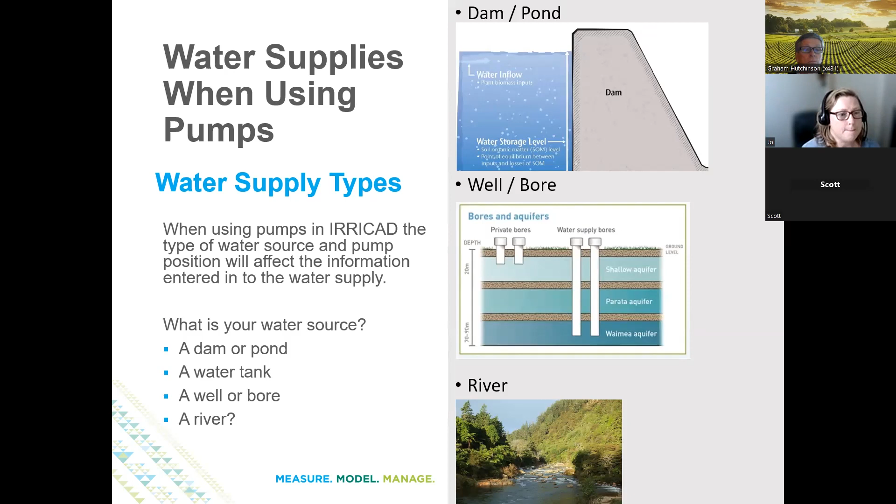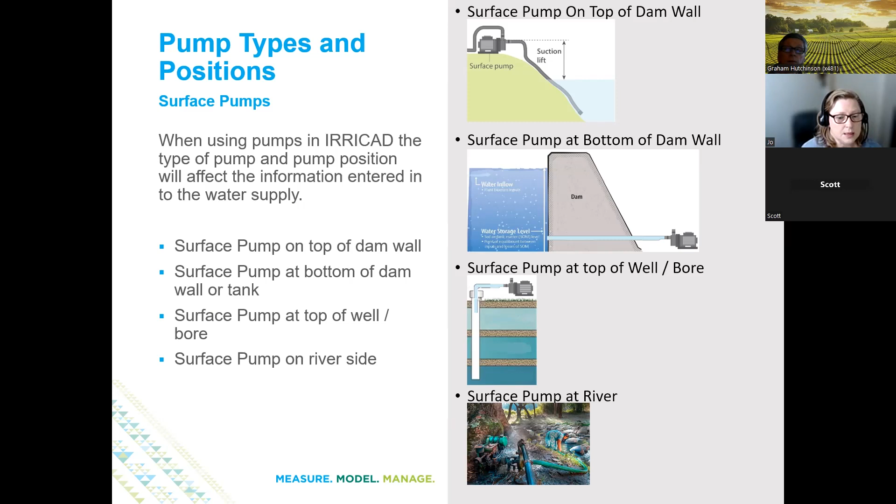The other thing that we need to consider is the position and types of the pump. So if it is a surface pump, where is the pump position? Is it on top of the dam wall? Is it at the bottom, pumping out of the bottom of the dam or water tank? Is it pumping out of a well or a bore? Is it pumping out of the river? And if it's a submersible pump, what type of water source is it? Is it a dam, pond, or tank? Is it a well? Or is it pumping out of the river?

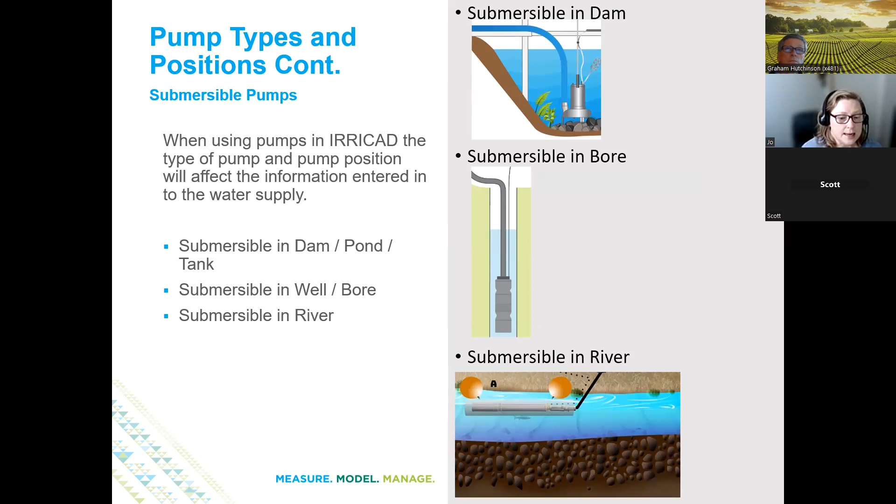Now, these things all come together to help us know what type of information we put into the water supply or the water source that is in our Irricad design. So they are measured differently depending on the pump type and position. So if it's a surface pump, the important thing is what is the level of water below or above the pump in meters or feet. And if it's a submersible pump, where is the water level relative to ground level? So depending on the pump and depending on the source, these will be different.

And I've put a note there for myself. I mean, you probably know this off the top of your head, but one foot of head is 0.433 pounds per square inch. So I'll have to keep that in mind if I need to do any calculations.

Right, so the time that we would be putting negative design heads into the water supply is if the surface pump is pumping out of a well, so the water level is below the pump, or if you have a submersible pump where the water level is below ground level, such as in a well or a dam where the water level is definitely below the normal ground level.

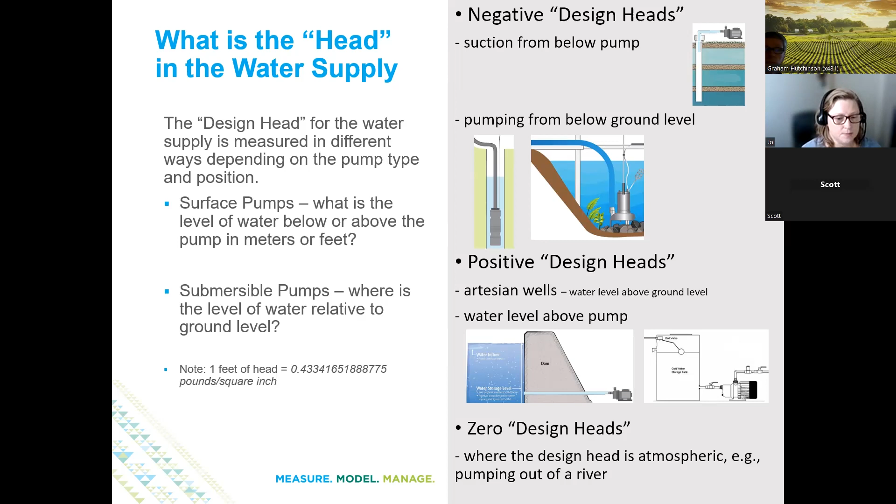And there's also other factors to consider when you are using pumps in an Irricad design. So for surface pumps, you might want to add in the allowance for suction hose losses, headworks losses, such as what is in around the pump station, such as pipe work, elbows and tees, isolating valves, filters, etc.

And if you're pumping out of a well, there will be drawdown in the well. So that's irrespective of whether it's a surface pump or a submersible pump, there will be drawdown if it's a well. If you're using a submersible pump, then we're going to have losses in the rising column, as well as other headworks losses. So these items can all be included in the design for Irricad to hydraulically calculate the friction losses based on flow.

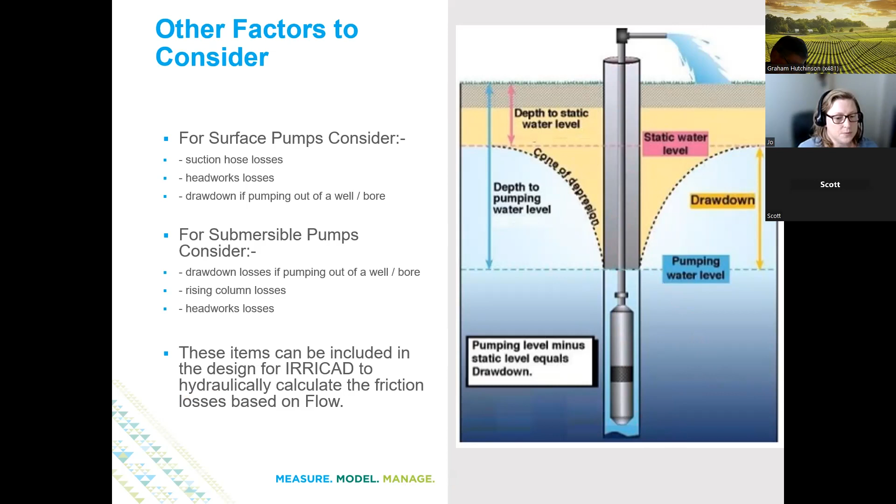So we can add those items one by one along the main line after the water supply. So we have our water supply and we've determined what the design head will be based on the water source type and the pump and position of the pump.

Next, I like to place the pump on the main line, because if this is a negative pressure, we're going to have negative pressure in the pipe until the pump adds pressure into the system. So if I put this next, then I know there's only going to be one pipe with negative pressure. And if I'm getting messages about there being more than one pipe with a negative pressure, then I know that I need to go and have a look to see where that is.

And here you can see that I've placed drawdown losses, rising column losses because my pump is a submersible in this case, headworks losses, and you can do headworks losses in a couple of different ways. You can have it as a set value, and you might want to do that for things like an automatic backwash filter or even a manual filter,

where you know that there's going to be a pressure loss or a maximum differential across the filter before it will be cleaned, and you want to allow for that maximum so that you know that even when it's just before being cleaned, there will be enough pressure in the system to provide the valves with the pressure that they need. And you can also have these values based on flow. So when there's a higher flow, there's a higher head loss. When there's a lower flow, there's a lower head loss.

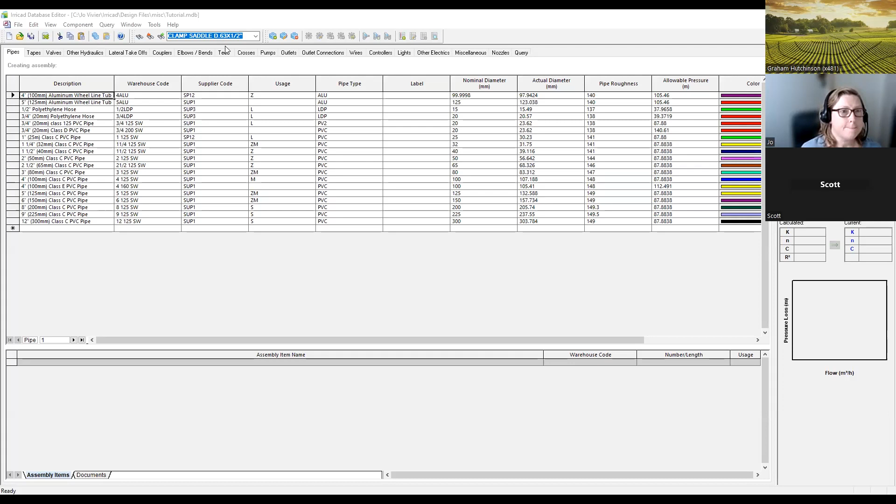Thanks. Okay, so I've actually put the pump in, but I'll show you how I did it. I just need to move that out of the way. Right, so with pumps, you want to have a pump curve that you can get information from into the database editor.

So here we have, oh, this is going to be awkward, isn't it? Oh no, it's a screen, not an application. That's cool. Can you see the manual on the screen? No, we can't, Jo. You're just seeing the database editor. Yeah. You'll need to share the screen, not the application, I think. Well, it does say screen sharing. So let me just see what I can do. Except it doesn't want to pop up. Ah, because I'm looking on the wrong screen. Sorry, my controls have gone very small and I can't seem to get them bigger. Okay, stop share. Share screen. Okay, can you see the notes now?

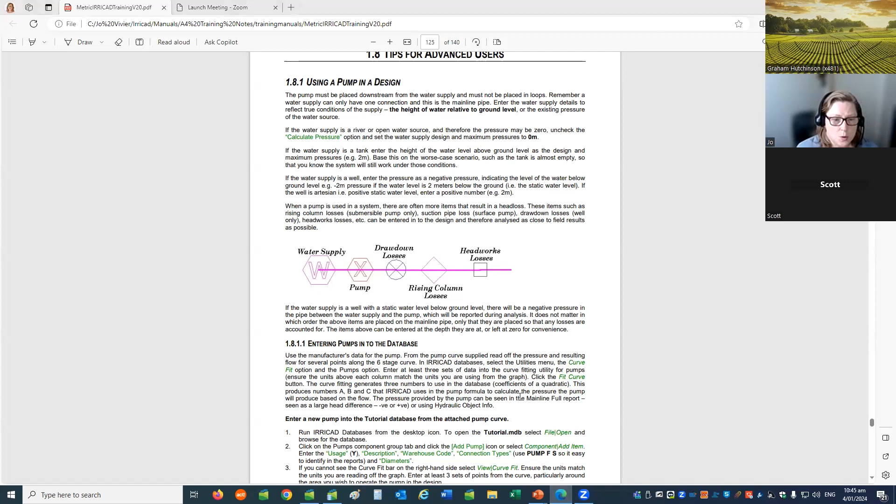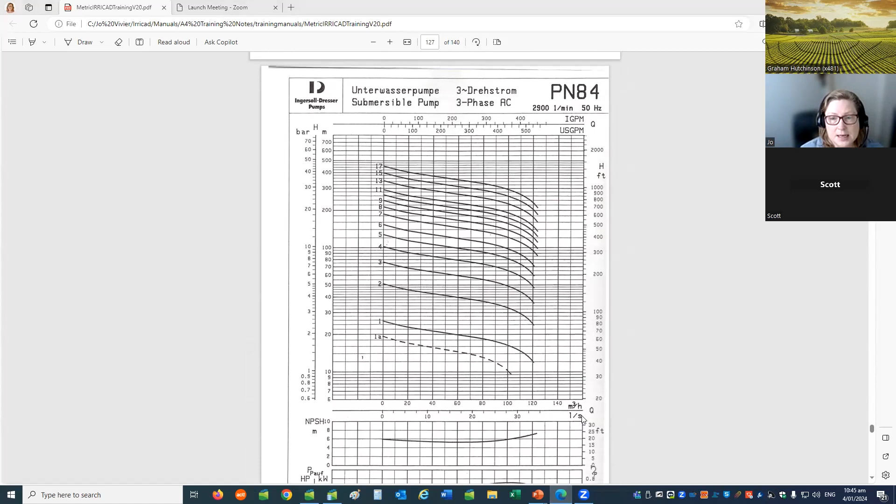Yes. Okay, so when we're using a pump, we're going to have a look at a pump curve. And of course, if you have a table with the pump curve, that's a lot easier than reading the information off the screen. So here we can see that this particular pump curve has all sorts of different units, so you can choose the ones that you like to use. So we've got bar, meters, cubic meters per hour, liters per second for metric, and we've got feet, US gallons per minute, and if you really want to, imperial gallons per minute.

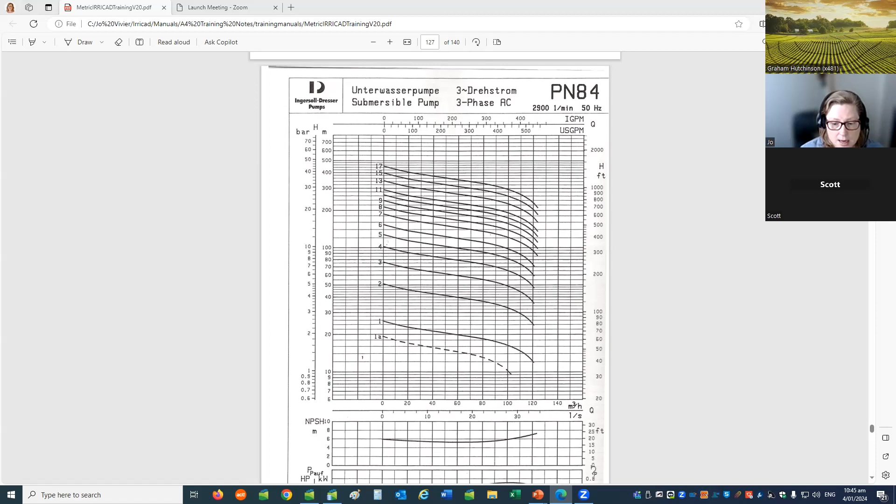And when we go back to the database editor, hopefully that shows straight away. Yep. We can see that we can choose all sorts of different units for the flow and for the pressure. So you can choose whichever ones you want, as long as you make sure that you keep reading the correct units off the chart. So I'm just going to put in the metric ones because that's the ones that I'm used to reading off this chart.

And we're just going to put in this 6-stage curve here. So when I enter the information, you need at least 3 sets of data to be able to get the curve fitting to produce some numbers for you. But put in as much as you can within the working area of, in this case, a pump. Okay, so these are just figures that I have read off the graph.

We click Fit Curve, and well, they're slightly different to what I had there before. If you want to update the information, that's there. And when you put in a new item into the database editor, it's going to copy either the first item in the list or a specific item that you've selected. If it's quite similar, then there's only a few things you need to change. But one of the things you will be changing is the hydraulic performance of the item.

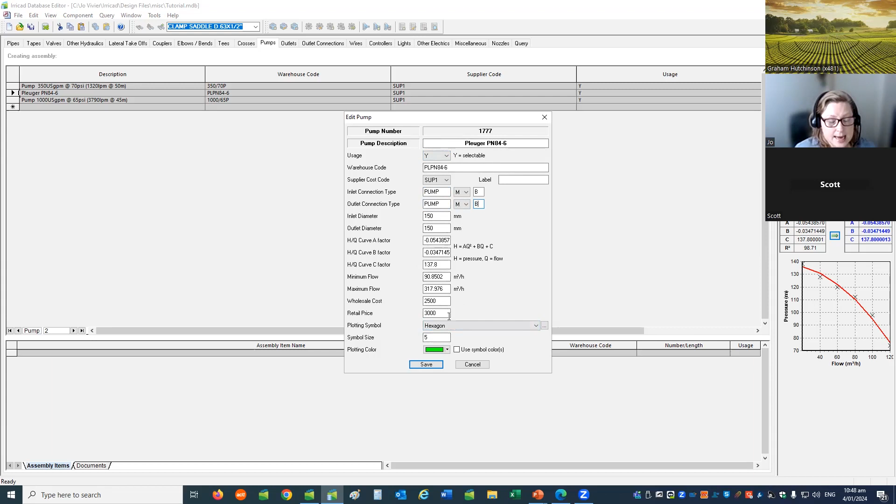And what I'm going to do for the purposes of this tutorial is just change the connection codes to pump so that we can easily see this in the reports that we're going to be looking at in a minute. Okay, so we've given it a plotting symbol. It has a price. It has minimum and maximum flows, and of course the hydraulic data that we've told it needs to have. So then Irricad knows how this pump is going to perform based on the flow going through it. Okay, so here is the item.

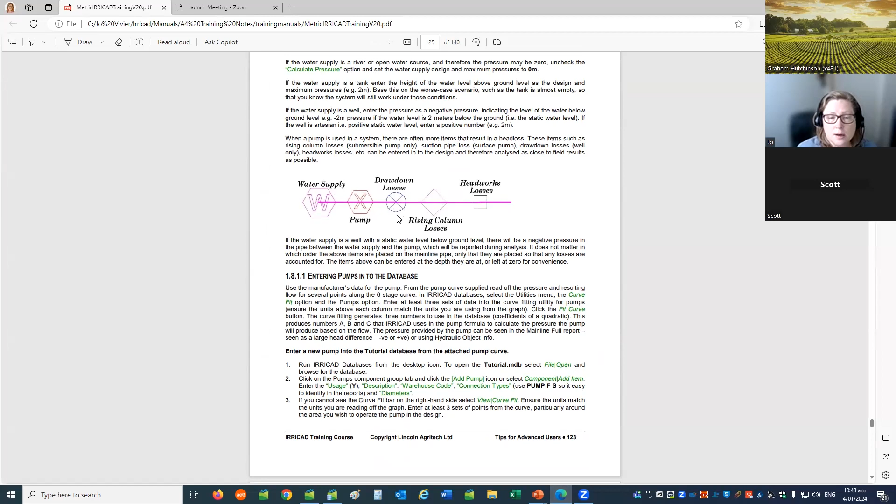Now, the other items that we need to consider that we can see in our little graph here are things like drawdown losses for a well or a bore. Now, drawdown losses are typically based on well tests. So this will be the pumping level minus the static water level. And the database group that we put it in is the other hydraulics. And this tends to have the equation of head loss equals a constant times the flow to the power of an index plus C, which is an intercept, which may or may not be used.

And if we go back to the notes, we can see here that internally, regardless of what units you might put into the curve fitting table, internally the head loss is in meters and the flow is in cubic meters per hour. So if you were going to be working things out just using that equation, which is what I'm going to be doing because I only have one well test or one drawdown test, you need to make sure that it is in those units.

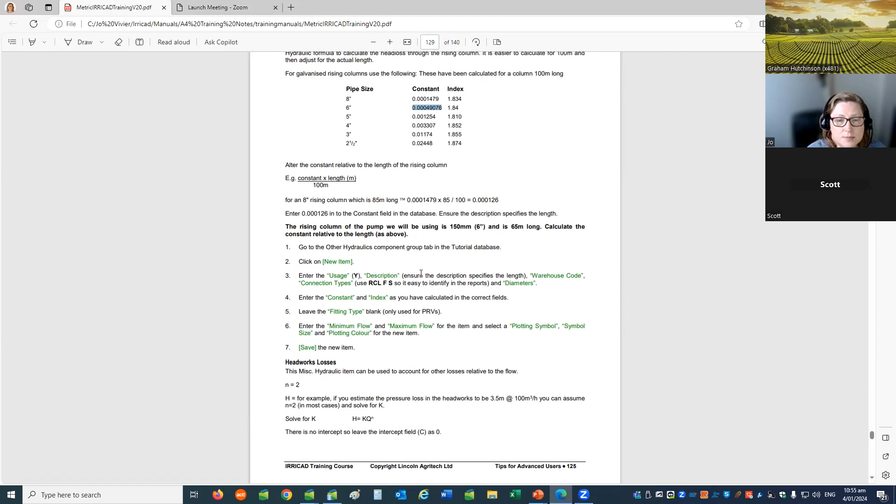But we have one that's only 65 meters long. So we need to solve for what the constant will be, which is a fairly easy calculation in this case, that we're just multiplying this number by 65 and dividing by 100. And that will give us this value here.

And now note that anything that you put into the database, you should give quite specific description so you know exactly what they are, particularly in the case of drawdown losses. You probably want to put the client's name and well name in there if he's got more than one, so that you know it's specifically for that well.

So here we've got, in this case, 65 meters of a 6-inch or 150 mil pipe. And once again, I've just given it an inlet connection code, an outlet connection code of RC for rising column, so that I can easily see this in the design reports when I go looking to see what the effect of the flow is on the pressure loss.

Headworks losses. There's actually two ways that we can do headworks losses. One is to have it, as I explained before, that it changes based on the flow. And the other is that you have a set value. So if we say that we know that there's 3.5 meters of head loss at a flow of 100 cubic meters an hour, we can solve for the constant, and we find out that when we put that in, so misc losses 3.5 meters at 100 cube. If I've put in enough zeros, it will turn out all right. It's 0.00035 in this case. So that's on for selection. We've given it a special connection code.

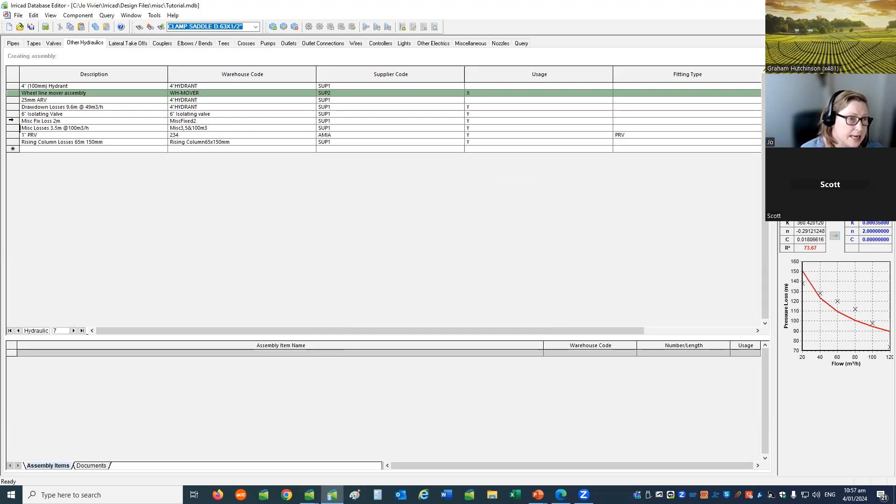And the last one that we're going to be doing is the miscellaneous fixed loss. So I've only put 2 meters on this at the moment, but if you're going to be putting this in to account for the pressure loss over a filter, then you might want to put that a little bit higher. But here you can see that there's no constant and there's no index. So this has no relationship with the flow. It's always and only going to have a 2 meter head loss every time this is placed in the system.

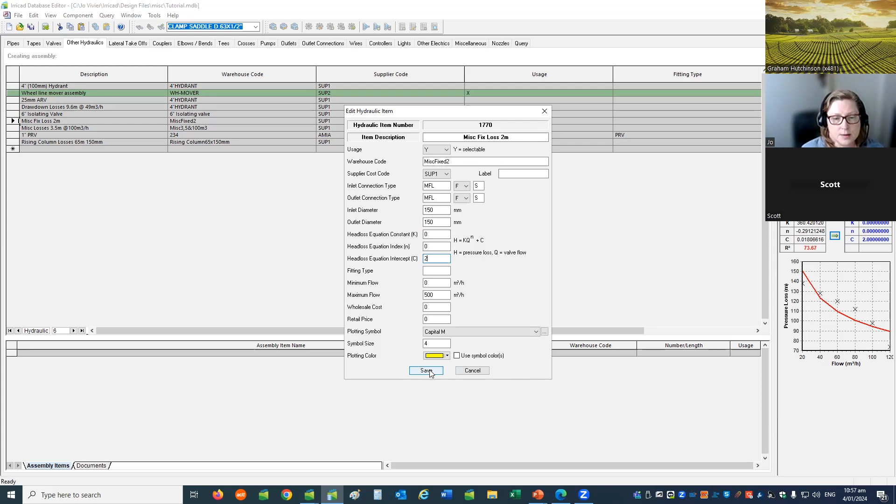Okay, so what we'll do now is we will place it on a design. So if we go first with our water supply, and this is going to have a value of minus 10, I think it is.

Okay, so we have to untick calculate pressure when we are using pumps. And the maximum head has to be equal to or greater than the design head, and I tend to just use the same value in 99% of cases. So don't calculate pressure; set the pressure based on the water supply or the water source type or the position of the pump, as we discussed before.

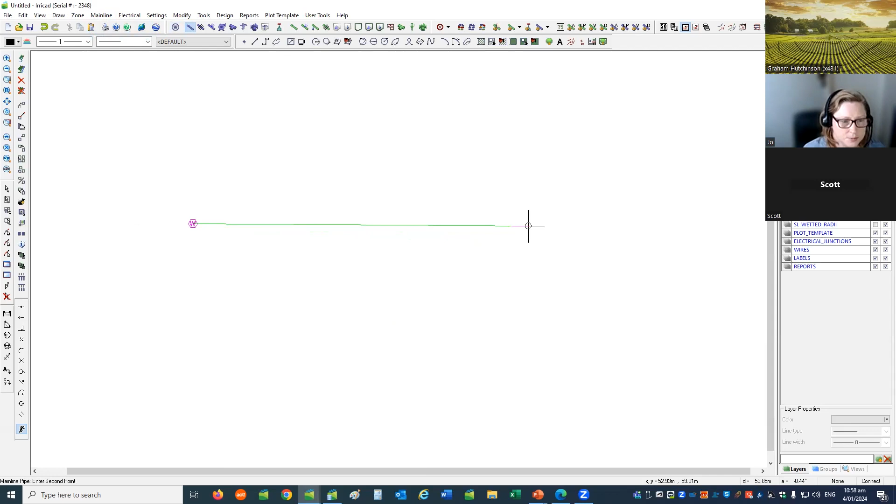So place that. I'm going to put in an 8-inch pipe for the purposes of this particular tutorial. And then on that pipe, I'm going to place the other items. So let's go to pump. We're going to place that Pleuger pump that we put into the database. Okay, so now I know that as soon as it gets past this point, there's going to be positive pressures in the pipe.

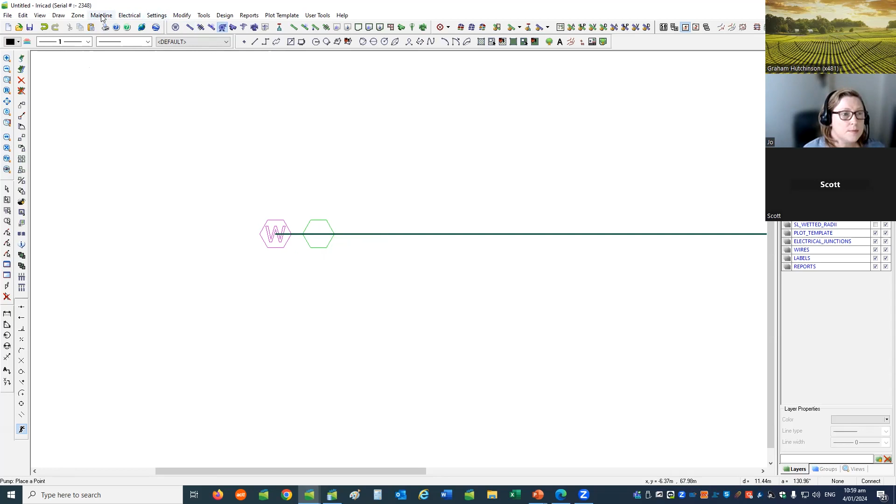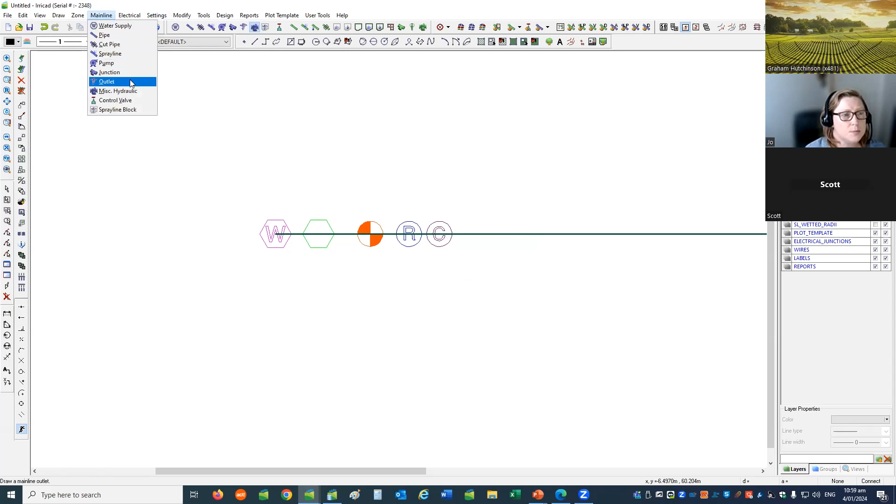And the other items are all in the MISC hydraulic component group. So we want to put in the drawdown losses and the rising column losses. Oops, MISC hydraulic. Miscellaneous losses. And of course, if you've got isolating valves and other things like that, then you can place those on the line as well. And MISC fixed loss.

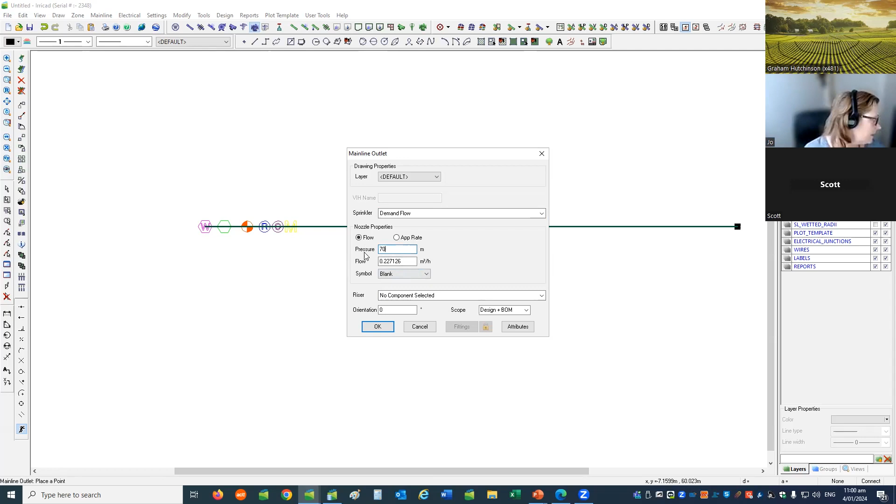Okay, and on the other end of the pipe, I'm going to put an outlet. I'm just going to use a demand point for the purposes of this tutorial, which as you can see, you can follow along in the manual at a later date as well. And it is going to be pressure required 70 and flow at 100. So we'll place that on the end.

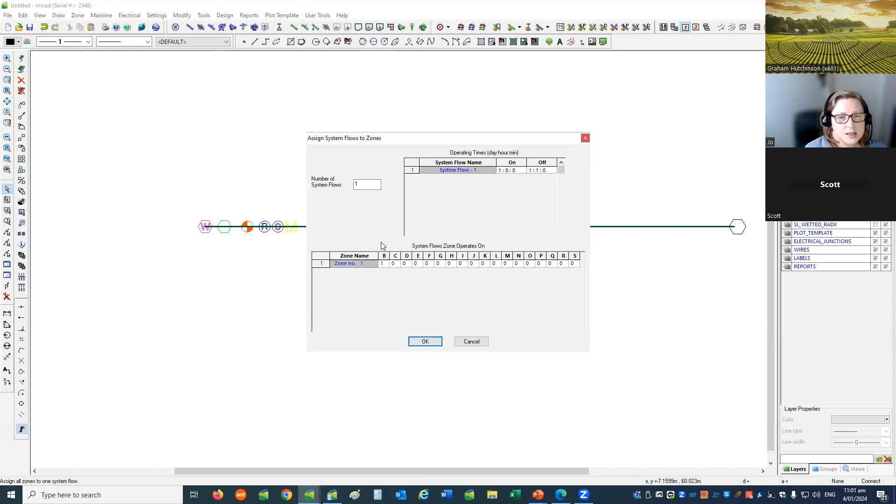Now this is what you would call a mainline design, that you don't have any zone pipe, but of course you need to analyze the zone, which is the outlet, so that the main line, the water source, knows what the outlet needs. So even though it's a mainline outlet, it's a valve and head outlet, and that is the zone. And we need to assign zones to system flow. So very simple on this one, just all zones to 1. So at that point in time, we'll be able to see what is happening in the system. And mainline design, I already have a pipe size, so I just need to analyze that.

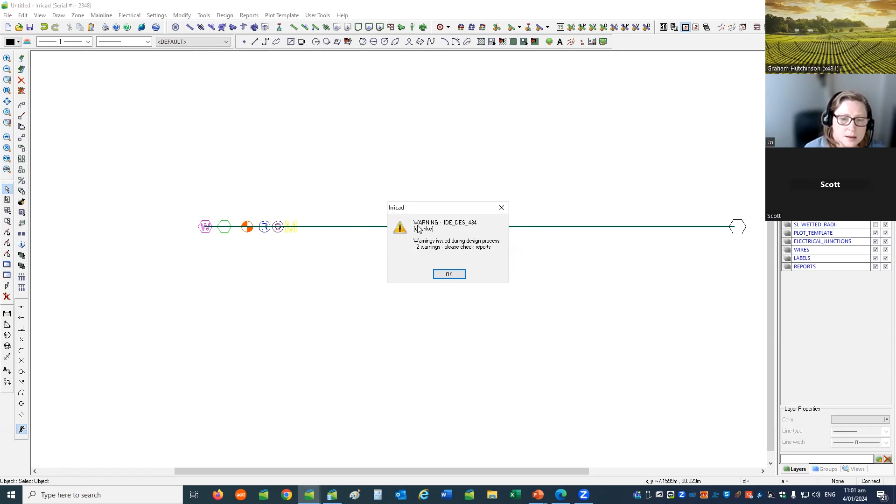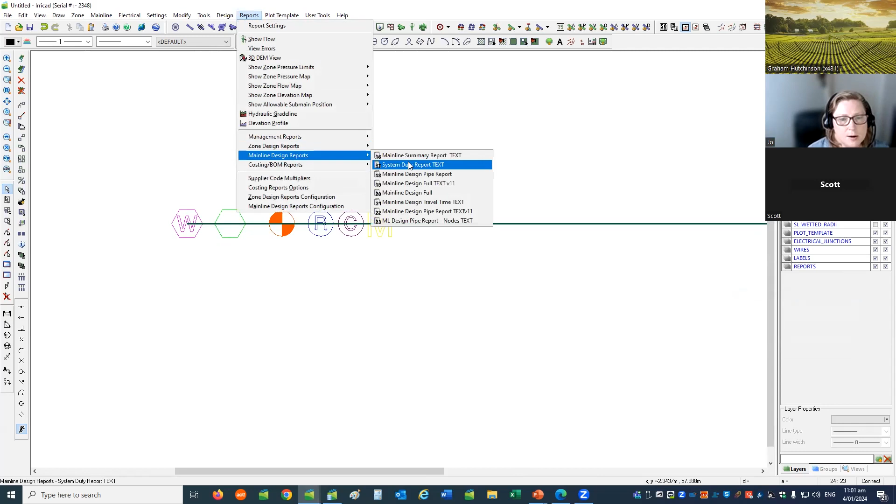And here's our negative pressure for just 1. And we're getting not enough pressure at our outlet. So if we have a look at that, this is object info. If you don't have it turned on, you can just tick this little checkbox here. And it is a bit under pressure. I think I must have put in some wrong numbers somewhere. Now we can actually query all of these items individually, but if we go to the mainline design full report, we'll be able to see very easily, because of my dummy codes, connection codes, what is happening here.

So here we can see that at 100 cubic meters an hour, the pump is inputting 94.87 meters of pressure. The drawdown loss is 19.92 meters. Our rising column losses are 0.15. Our miscellaneous losses based on flow is 3.5, and our miscellaneous fixed losses is 2.

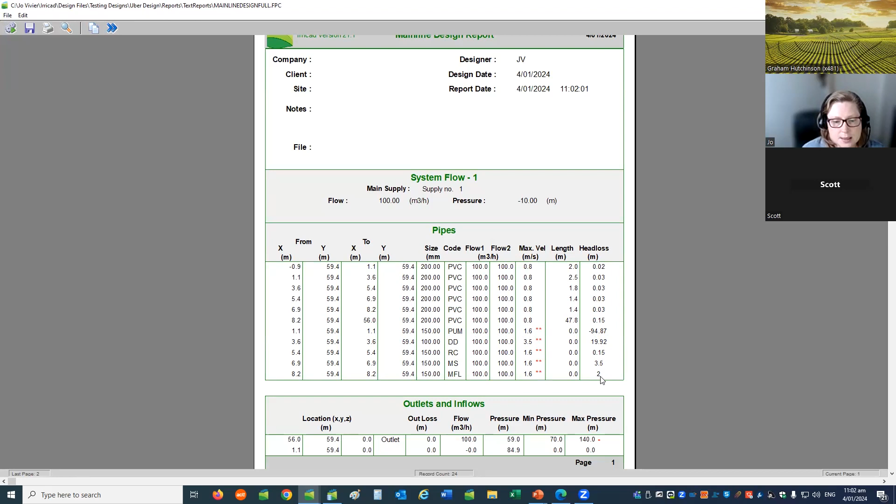Now, if we change the flow to 50 cubic meters an hour, come up, all right, 50 here. Now we've changed the zone essentially, so we just need to analyze that change and then reanalyze the main line. Okay, my pipe's a bit over pressure rated because of the lower flow. Let's have a look at that design report again.

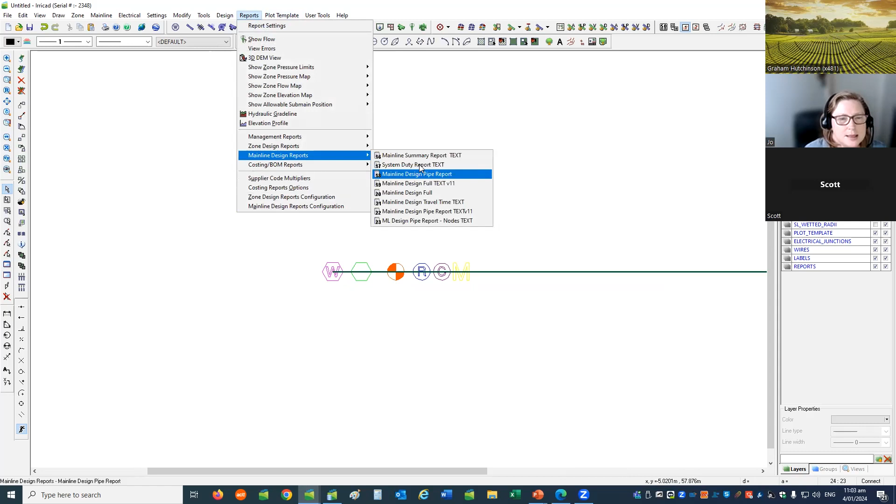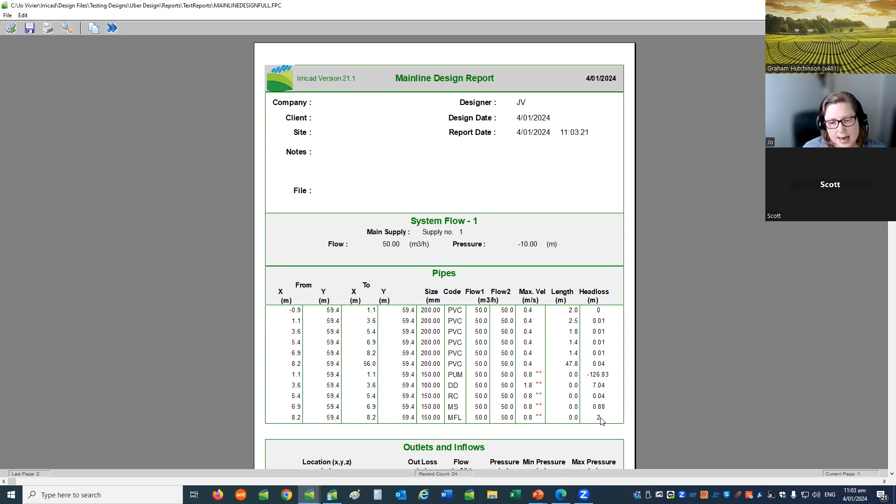Here we can see instead of 94 meters of input, the pump is putting in 126 meters. Drawdown was, was it 28 meters before? It's now down to 7.04. Our rising column loss, which is 0.15, is down to 0.04. Our miscellaneous loss based on flow is down from 3.5 to 0.88, and our fixed loss has not changed because regardless of the flow, it's going to give us that 2 meter head loss.

Jo, just a note of translation: when you had 100 cubic meters per hour there, that's about 440 gallons a minute. And she changed it to 50 cubic meters an hour, which is about 220. Yes, I just halved the flow. So yeah, don't get too hung up on the units as the numbers. Yep. Okay, so what we'll do now is we'll try and go back to the other screen.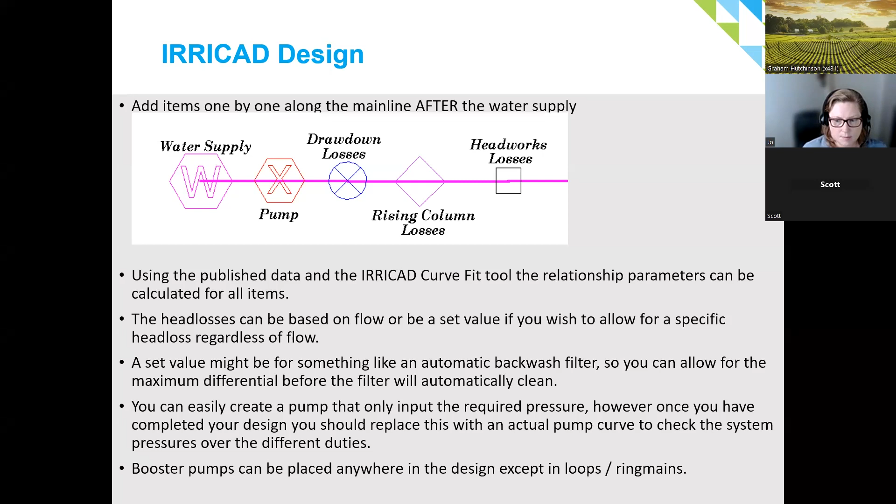The flow was changed and that changed the pump. Yes, the pressure rose significantly coming out of the pump. So changing the flow changed the horsepower. Well, yes, at that lower flow, the pump inputted more pressure based on its pump curve. The pump was fixed. Jo placed a certain pump in the design, and the initial design was at a higher flow. When she halved the flow, the pump came back on its curve and produced a lot more pressure.

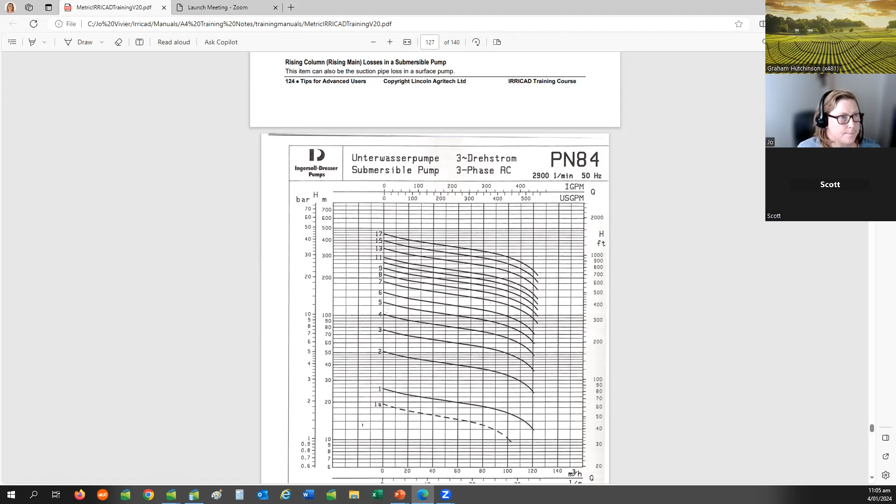And that's pretty useful in this. You design for the worst case scenario a lot of the time with the highest flow, but to be able to see what happens when you're running at lower flow, it can really bump the pressure up in other places in the design. Okay, so we'll just have a quick talk about the, whoops, sorry.

Other things that might be in the, sorry, I keep clicking the wrong button. There we go.

Okay, so you can put pressure reducing valves in a design. You can put them anywhere really, but if they're going to be placed at the headworks, to do a quick design instead of putting in your pump and all your head loss items, you can just set the water supply pressure to what the PRV would be set to. And then you can quickly carry out the design and leave the pump sizing and headworks hydraulics to a later stage.

And one thing to remember about PRVs as well as pumps is not to place them inside a loop or a ring main. When you're putting a PRV or break pressure tank in the design, you can use a miscellaneous hydraulic item that has PRV entered into the fitting field in the database.

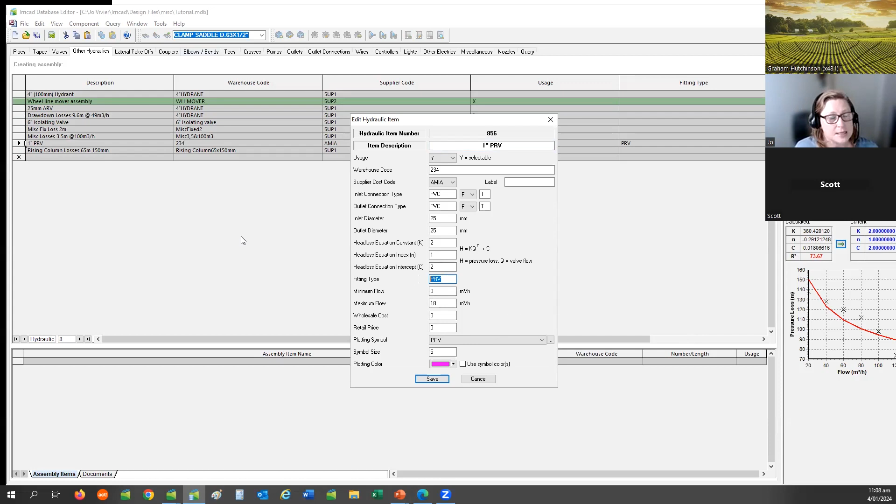So, let's just see if I can drag that over. Can you see the database editor there? Yeah. And if we look at, here's a PRV, it has PRV in the fitting type. And as soon as Irricad sees that, when you place the item, it's going to ask you what pressure you want downstream of that item. And as long as there's enough upstream pressure to deal with all the pressure loss through the item itself, then it will regulate. If it can't regulate, it will tell you that you don't have enough pressure to regulate.

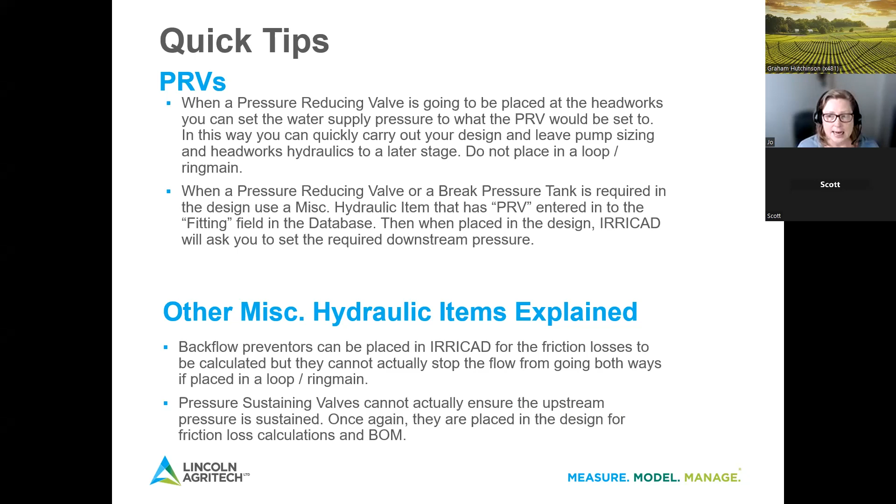Other things like backflow preventers can be placed in Irricad for friction losses to be calculated, but just note that they don't actually stop the flow from going both ways in a ring main. It doesn't know, for backflow preventers or check valves, that the flow can't go back the other way. So if it's in a loop, it will do so. And pressure sustaining valves don't actually ensure that the upstream pressure is sustained in an Irricad design. So once again, they're placed in the design for bill of materials purposes and for the friction loss calculation through the item.

Multiple water supplies. Well, we've got lots of different design types. You can have one system with one water supply. And you might not be able to see it clearly, but the little water supply has gone a maroony colour because it's a combination of all these different colours of system flows. You can have one system with multiple water sources, and these two water supplies are exactly the same colour because they are both supplying all of the zones in the system.

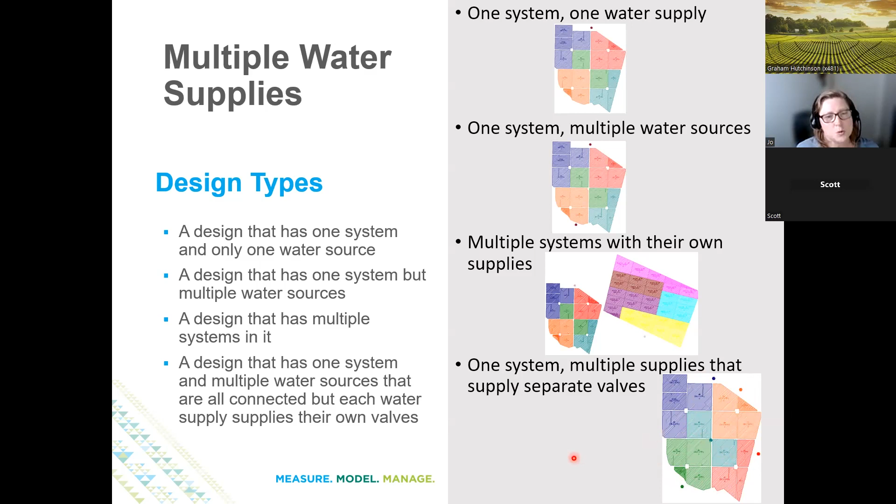You can also have multiple systems on the same design with their own water sources, and you can have one system with multiple supplies that supply separate valves. So just to make this easy to see, I've got a blue water supply supplying the blue zones, an orange one supplying the orange zones, red for red zones, teal for teal zones, and green for green zones. But of course, we can also have multiple systems with multiple water supplies on the same design. It all comes down to your management of the system flows.

System flows are a method that Irricad uses to specify which valves are running together. So at any one point in time, you want to say, well, what is running together at this point in time? Each system flow occupies a unique point in time. So if you have multiple water supplies supplying separate systems, they need to have unique system flows. So even if they're both running from 10 a.m. to 11 a.m., which is quite likely in the real world, you cannot put them into Irricad that way. The supplies need to have separate system flows.

Now, if it's a bit hard to do graphically and you want to do it in the table, instead of putting in every system flow, you can use groups. So instead of going 1, 2, 3, 4, 5, 6, 7, 8, you can go -1 in the first column and -8 in the second column. And so you can see that this table shows that we've got supply number 1 supplying system flows 1 through to 8, supply number 2 system flows 9 through to 16.

Oh, and I've made a bit of a mistake here. If they are all separate systems, I've got 16 in my supply number 3. If it is not connected to the valves that are running on system flow 16 and only supply number 2 is connected, when you run mainline design, it's going to say an item is not connected to the mainline.

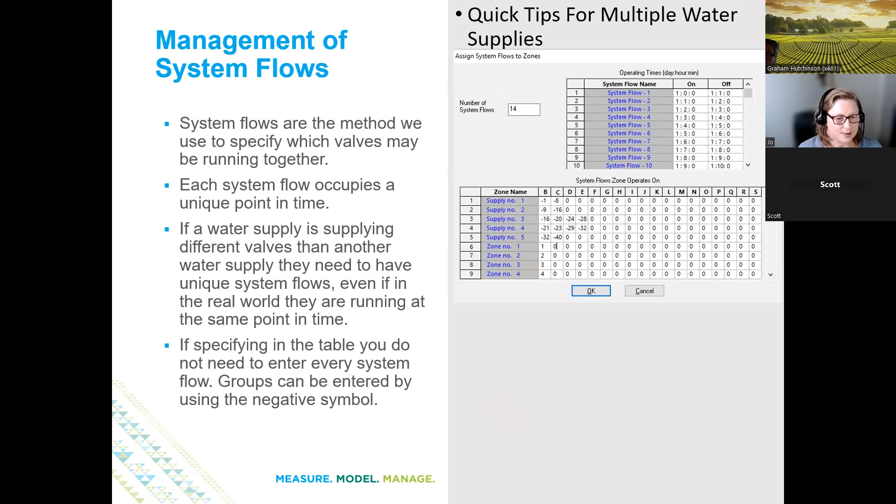Right, fixed flows or fixed pressure. So these days in Irricad, you can tell a water supply to have a fixed flow and fill in the design flow and of course max flow as well. Now you can only do this if you have more than one water supply. Well, I guess you could do it if you have one water supply, but only if you have one system flow in the design. Because if you have multiple system flows and they have different demands, then you're going to be getting errors, because the fixed flow is the fixed flow. And if it doesn't match what the demand is, it will tell you all about it.

Okay, so you can set fixed flow on one or more water supply, but you need to have at least one where you have set the pressure. So these ones will be able to say, okay, this is the flow I need, and it will work out what the pressure will be at those water supplies. And then on the one or more that have a fixed pressure, it will work out the leftover flow that it needs to account for to make the system balance and work based on the other fixed parameters.

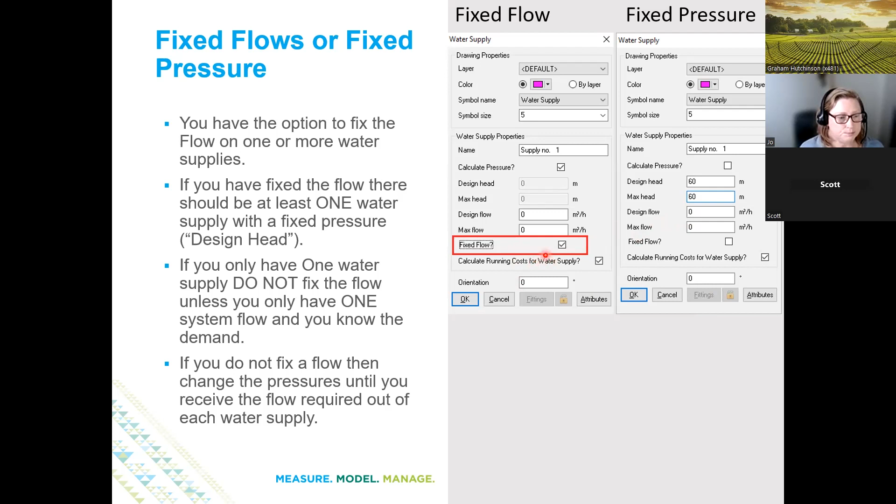Of course, you can have multiple water supplies and multiple pumps in a system. Fixed flow has been around for a few versions of Irricad, but previously you didn't have a choice, you would have to fix the pressures in all of the water supplies and make small changes until you had a balance of the amount of flow you wanted out of each water supply. And a small change in pressure could have a large effect on the flows. So if you don't know what flows you need out of each water supply, you can do it that way.

It can be a little bit tricky if you have quite a tricky design or quite a lot of elevation changes. But if you add pumps into the system, it dampens it because those pumps can only work along the pump curve. And then the water supplies will be set to the value as we've discussed previously. So either the water level above ground level or the distance between the pump and the water level.

So we can't add pumps in loops. So if we have physically one water supply and we've got two pumps in parallel feeding into a single main line, to get that to work in Irricad, you would need to just add another water source. So it looks like it's pumping out of the pond or whatever it is, via two pipes through the individual pumps and then away into the main line.

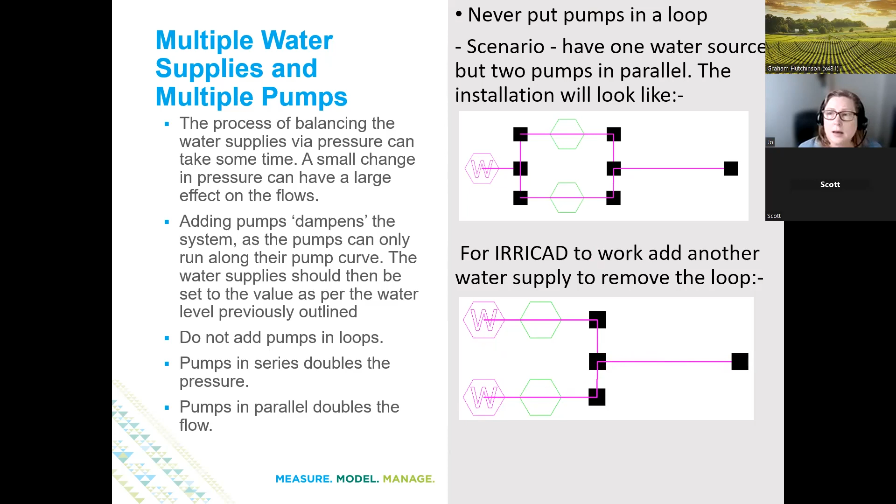How are we going for time? You're okay, Jo. Cool.

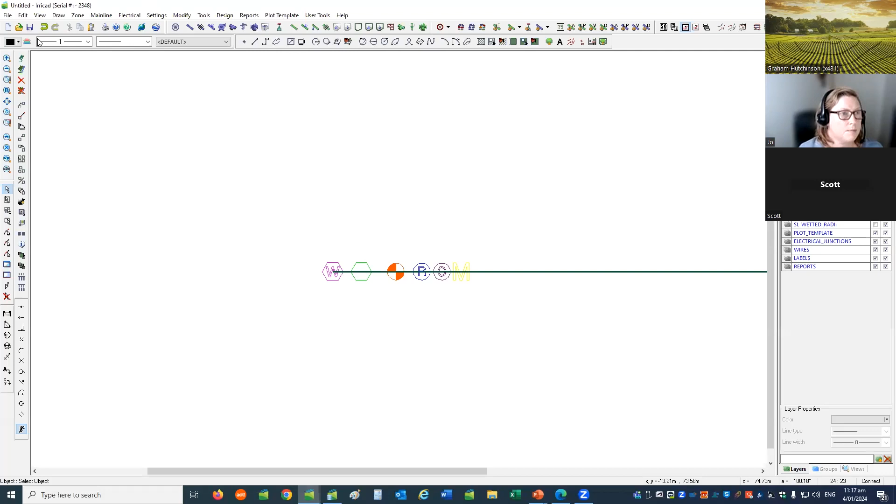And let's move you here. Okay, so you can see my Irricad screen? Yes, yep. Okay, so let's have a look at multiple water supplies on a system.

So I'm just going to draw in a pipe, a particular length. And what I've done is a little bit two-step in standalone. I need to draw a straight line first, a particular length, and then I can convert it into the item that I want it to be. Of course, in length, you can specify the length of pipes as well as lines.

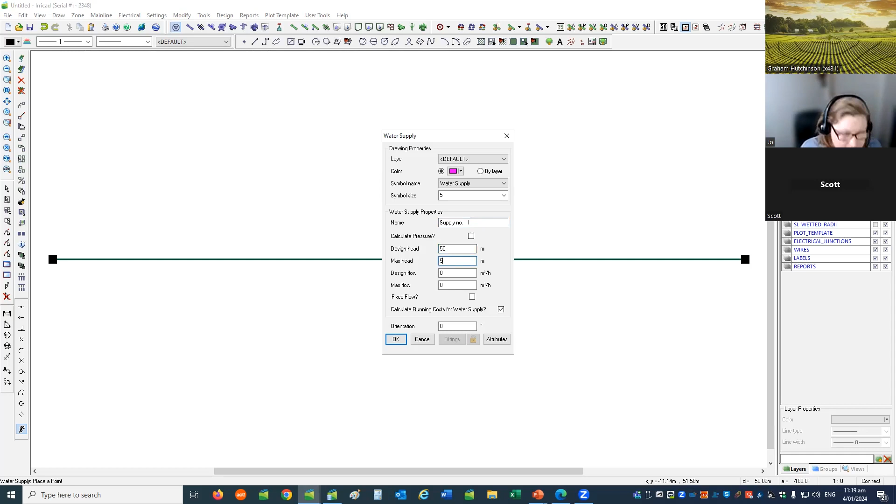Right, so we're going to have a water source over here. And they're going to be set to a particular pressure. And we'll do the same on this side. And we're going to place a demand point in the center, and that is going to have, yep, everything's 50 in this one.

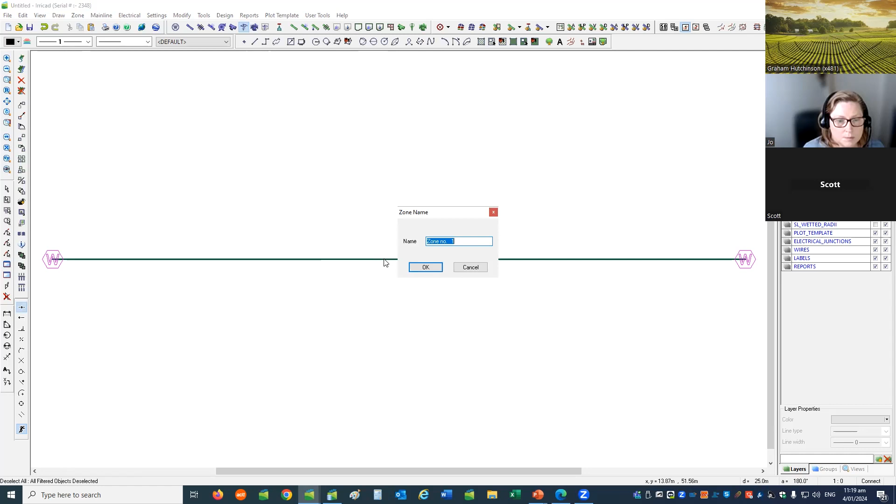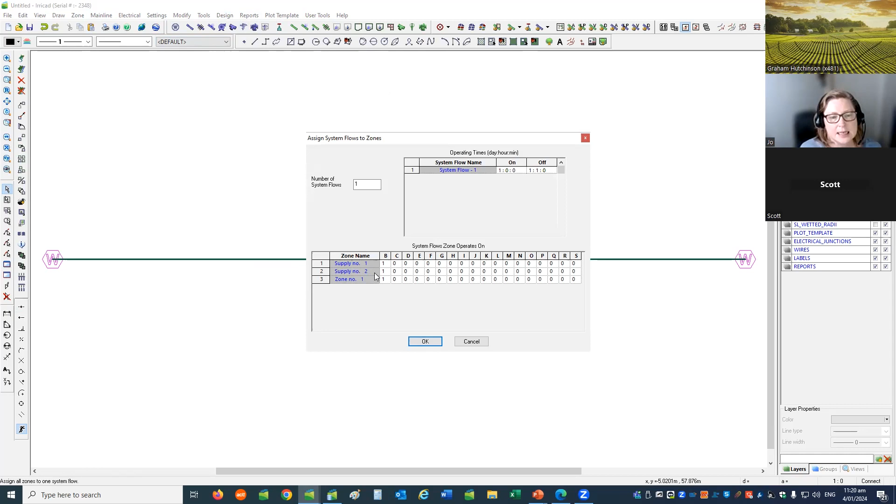Okay, so we've got our outlet right smack in the middle between the two water sources, and in this simplistic view there is no elevation change. So I'm just going to analyze that mainline outlet, all zones to one system flow, and as soon as we've got more than one water supply, you will see the water supplies listed individually in the management. If you've only got one, you won't see it there. And let us analyze that.

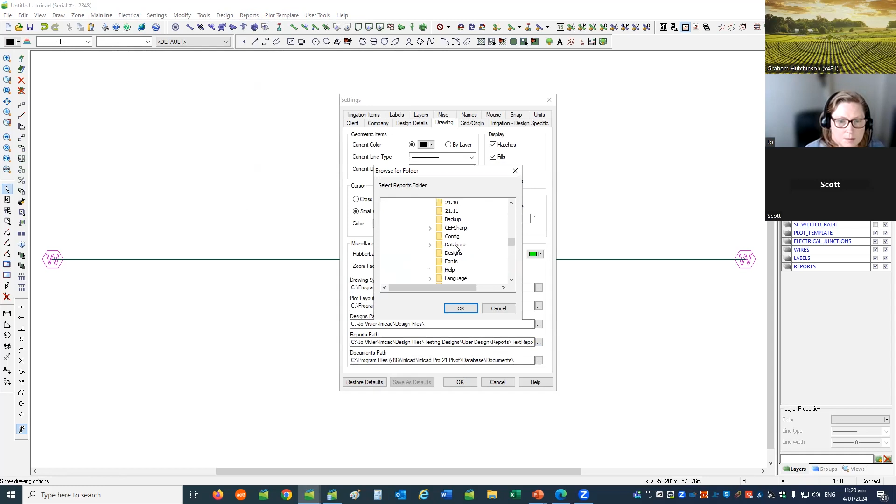Okay, so if we look at the system duty now, sorry, I just need to change my reports folder. And look at our system duty. We can see that each water supply is supplying half of the flow, so it's evenly distributed. So there's no elevation difference between the position of the two water supplies, and the item that requires the flow is right in the middle.

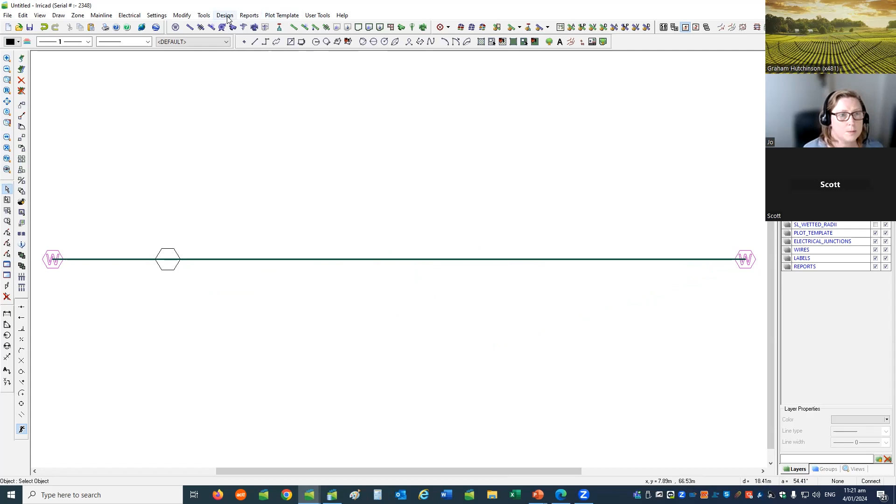Now, as we move this item along and closer to one water supply and analyze that change. So we haven't actually changed the outlet itself, so we don't need to reanalyze the zone. Unless, of course, there is elevation, then you would need to reanalyze it so that the correct elevation is assigned to the item. I'm just analyzing the main line, and we'll go and look at that report again. Sorry, system duty. And here we can see that the water supply that is closest to the outlet is supplying most of the flow, and the water supply that's furthest away is supplying less of the flow.

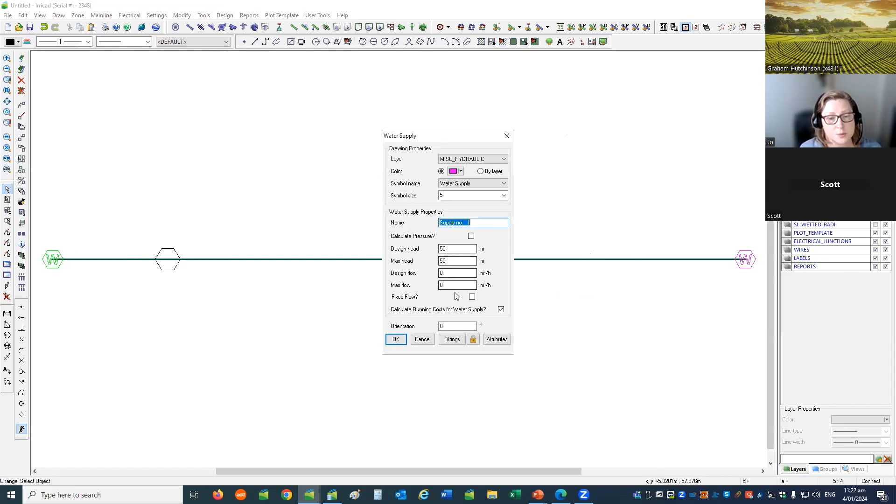Now we can set these water supplies. If we say that this one is a fixed flow, and we're going to say, well, you need to supply 35 of the 50. This one, of course, is a fixed pressure, so you have to have one that's fixed pressure. You can't fix the flow or calculate the pressure. If we then reanalyze

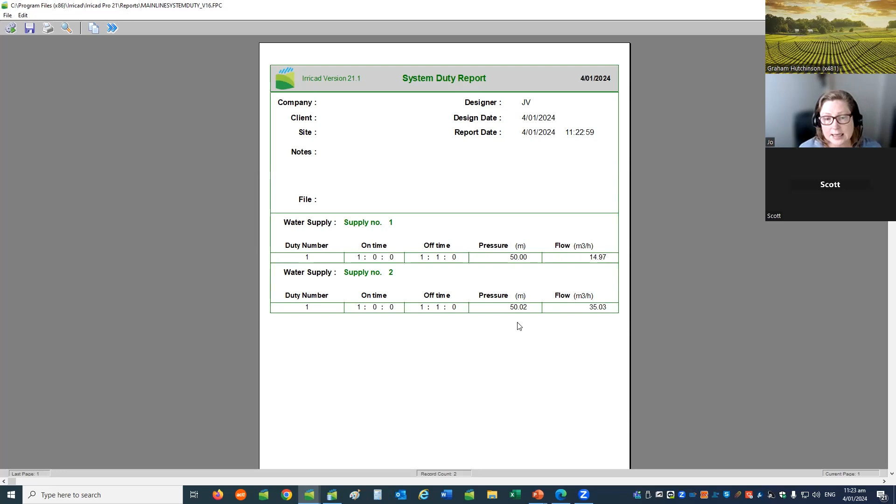and look at our system duty report, we'll see that it is supply number 2 that is supplying the 35 out of the 50. And the closest water supply has found that the difference required is 14.97. And based on the pressure, this water supply has calculated that it needs to supply 50.02 meters of pressure to get the 50 meters at the outlet. So this one was fixed, this one was fixed or fairly fixed. This was calculated, and the pressure was calculated on the other water supply. Any questions?

Looking good, Jo. How much longer have you got? We've got time, but just how much longer have you got? Well, I was going to say I'm finished, but if we need to fill in some time, we could look at the pumps in series and pumps in parallel as a redesign too.

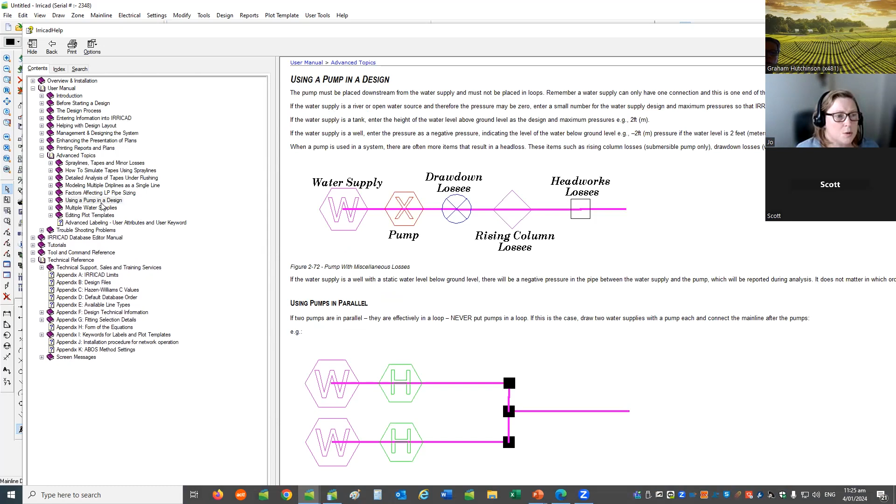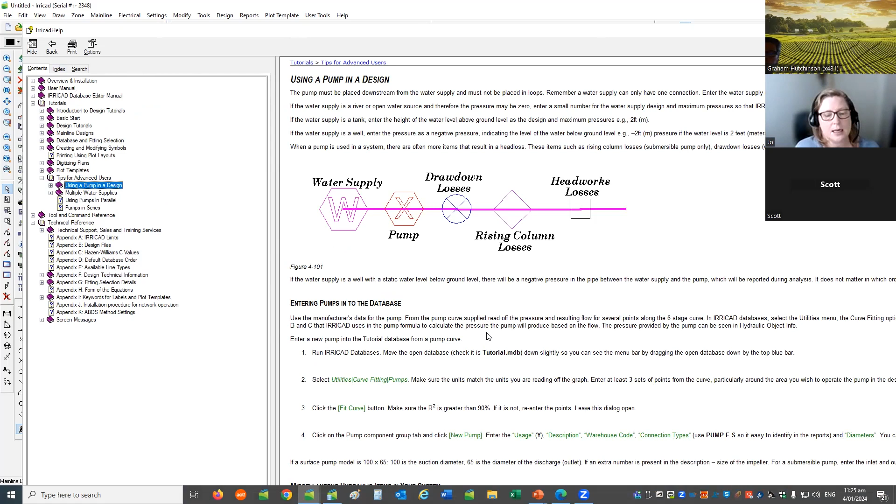Is most everything that he's covering covered already in the help? Question, Jo. What you've covered today, is most of that in the help files? Yes, it is. So it is available in two places. The theory is available in the user manual, advanced topics, using a pump in a design, and there's the multiple water supplies there as well. And it is also available in the tutorial section, tips for advanced users, using a pump in a design. And this has the same information that I've been using in the little designs that I've been doing.

Multiple water supplies, pumps in parallel and pumps in series. So you can actually work through it the way that I've done it and input that information. And yes, it does have US units in the tutorial as well.